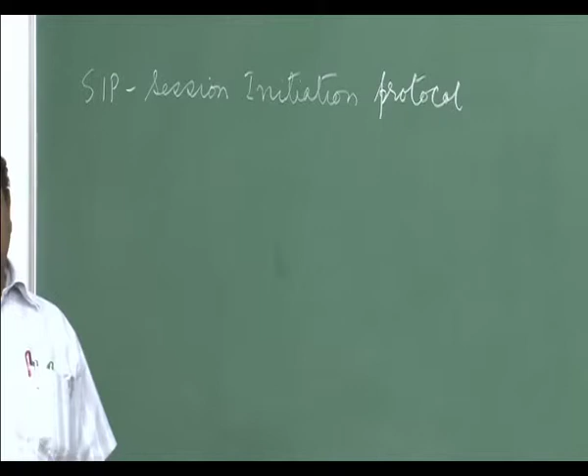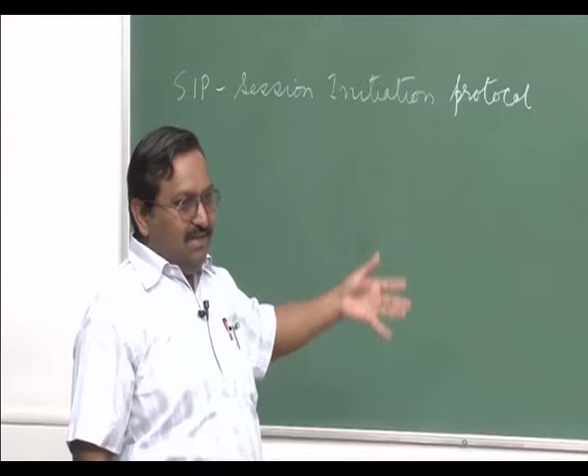Some of the small stuff I had already been telling about this protocol. As peer-to-peer computing evolved over time, it became the basis for voice over IP telephony, so people thought of building up a protocol stack. This was one of them. Then there was another one; the remaining four I have told in my earlier lectures. If they are paired together, they form a complete multimedia architecture functionality.

In a very limited sense you can build up a simple VoIP telephony system. In fact, all existing telephony infrastructure can be implemented with this, and most telecom operators will slowly be moving in this direction. One of the first was British Telecom, which made a complete change to voice IP based telephony. They no longer use circuit switching in their network; they use completely VoIP systems. Even for a telecom operator, it does make sense to build this kind of thing.

But as of now in India, I think it is not legally permitted to use IP based telephony unless it is PC to PC; PC to PSTN is not permitted here. The only exception is call centers, where over an IP network all the calls come in, and they are received over an ordinary telephone line. That is the only exception.

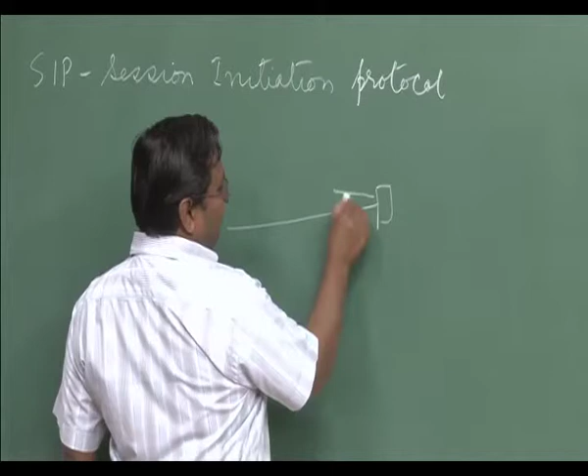As of now, operators actually do this, I think - that is my feeling, I have not verified this fact - but it is possible that from your home the phone goes all the way over the same copper cable, and at the exchange they just put a media gateway, and then within their network they can route this as a voice over IP call to the other endpoint, and again go out as an ordinary copper cable. So this is technically possible.

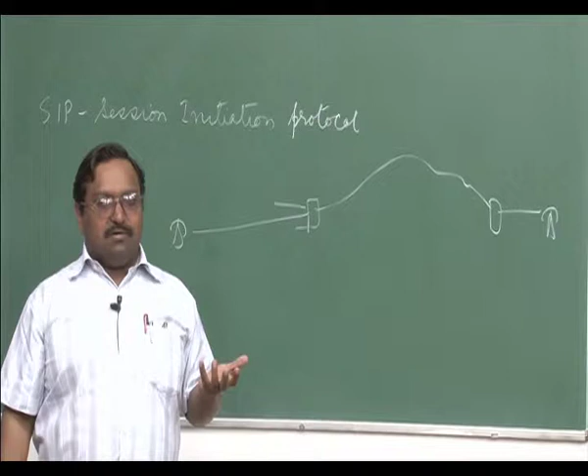So you don't get a feel for it - you still do all the dial-up and signaling that happens in the conventional structure, but in the core it makes sense to convert it to voice over IP, because your cost will be very low. You are only going to use bandwidth when the person is actually talking. Otherwise there is no packet being generated - if silence is detected, nobody is talking, so do not generate any packet.

That is a very specific feature in any digital recording system - this actually happens. For example, when I am not speaking here, the system will figure out that I am not speaking, there is a gap. Even if there is some noise or perturbation, the system should identify this through threshold detection, because when I am speaking the signal level is greater than a certain threshold, and noise is below the threshold. So when it is below the threshold, do not digitize - well, you can actually do digitization and get some PCM code for that, but that is immaterial, you simply discard it. This will be done by all the systems.

This means for a telecom operator, even in the core, if they start using this infrastructure it makes sense, because they will be able to push through a large number of calls, and they need not maintain two separate overlay networks over the same infrastructure. Currently they have to maintain an SDH, where voice is transported without any compression, because it is a 64 kbps channel fixed for every voice call. So he consumes 64 kbps per voice channel plus overheads, and then he has to overlay a data network separately, because most of these operators are also providing IP connectivity.

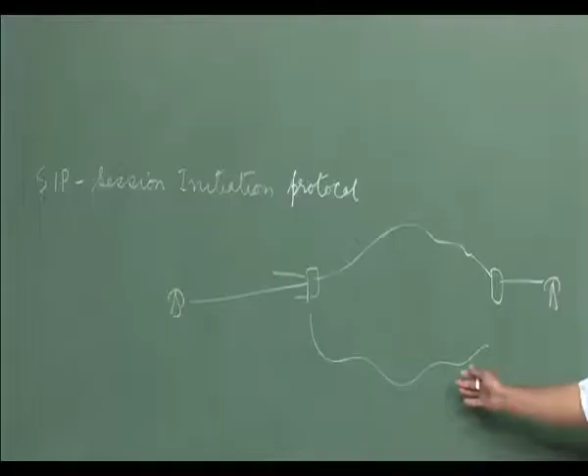If they go for this kind of infrastructure, there is no 64 kbps limit - there is silence detection, hence a tremendous amount of compression can happen, and no separate data and voice network is required. The only thing is that for voice you require quality of service support, and that can be handled using MPLS in this case.

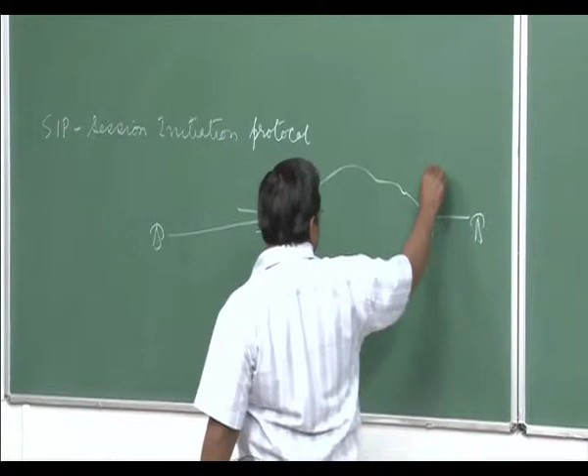So that will be one way, but in fact the user will never figure this out within an operator. And when an operator is going to talk to another operator - for example, if I make this a cloud of an operator - it needs to talk to another operator because the destination phone is there.

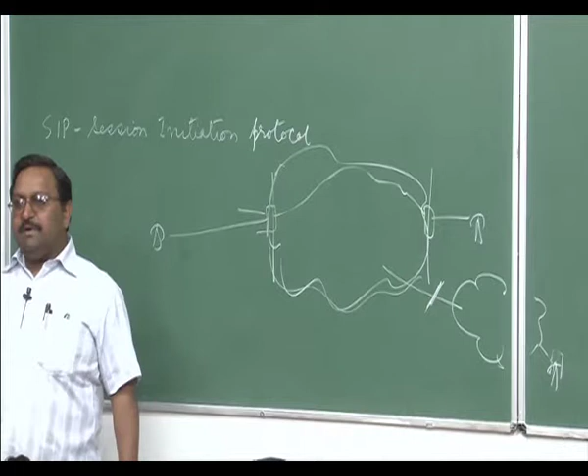This peering is not IP based. This peering is like conventional PRI lines kind of thing, 30 channel circuits. This typically happens in various different cities between the switches. This is an option, but I am not sure if this is being used in India as of now or not.

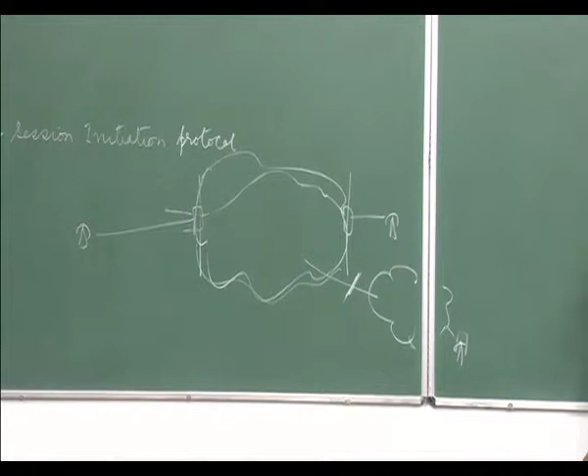This is mostly it will be a circuit switch link, it will be mostly PRI lines, primary rate interface ISDN is a 2 Mbps circuit over which 30 voice circuits can be set up at any point of time.

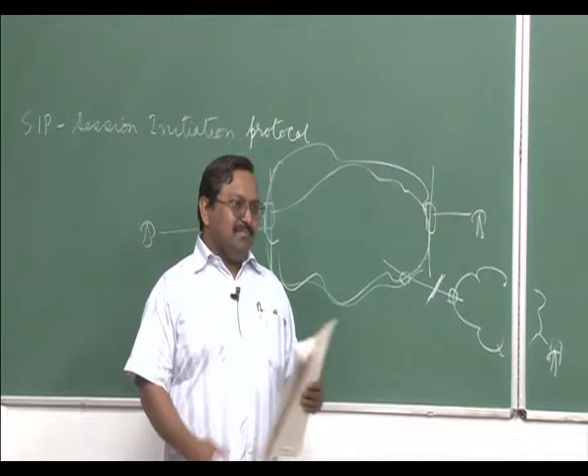It is E1 PRI is ISDN PRI. In fact that E1 is of two kinds, R2 MFC and PRI, but R2 MFC is no more in use, mostly PRI lines are used. The only difference is the signaling channels, how the signaling is actually happening for various voice circuits, that is the only major difference. R2 MFC are no more in use, nobody uses them, because we discarded them almost 7 or 8 years back at IITK.

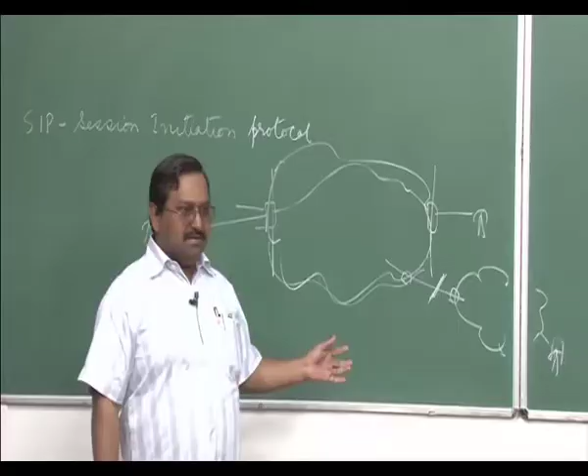Now, coming to SIP. So, how will SIP actually work?

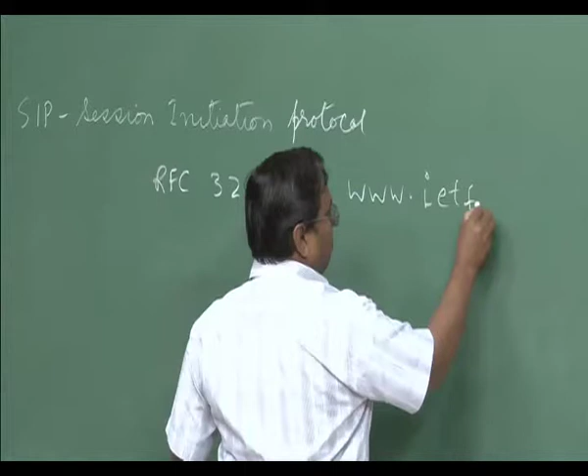So far I have given the name, now let me give the number of the RFC. The RFC number which defines the core of this is RFC 3261. This RFC is available at, and currently it actually obsoletes an earlier RFC which was 2543.

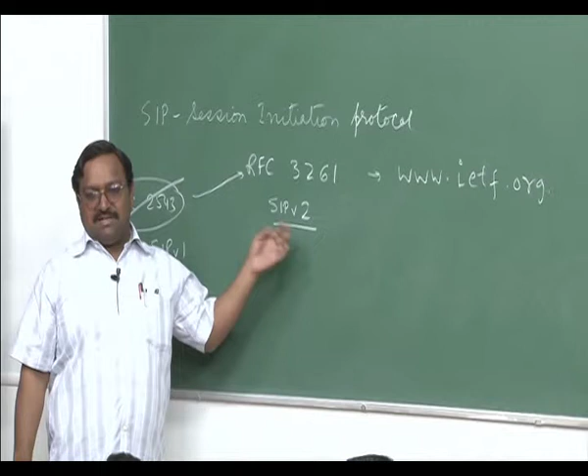This was the older one, this has been scrapped now. All systems actually follow this SIP, and it is not explicitly mentioned, but nowhere in the text in RFC do we call it SIP version 2, except when you look at the header fields which are being transported between two endpoints. That is where SIP/2.0 will actually come.

The way HTTP has HTTP/1.0, HTTP/1.1, same way we will have a specification here, but this standard itself does not tell that it is SIP version 2. This was SIP version 1.

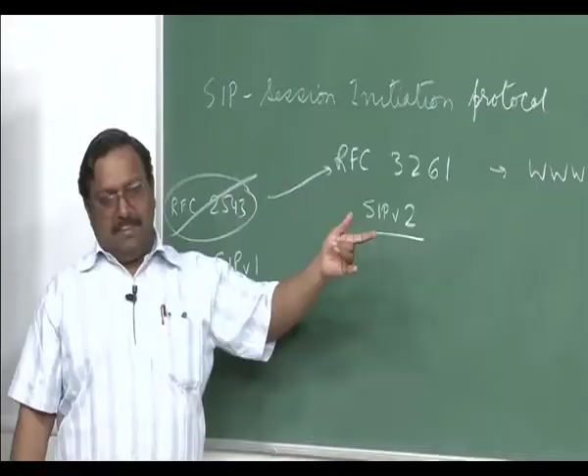So currently we always look for, most of the equipments are built with this. There have been some changes in between, so I am not going to cover this particular part. We will be working only with this one.

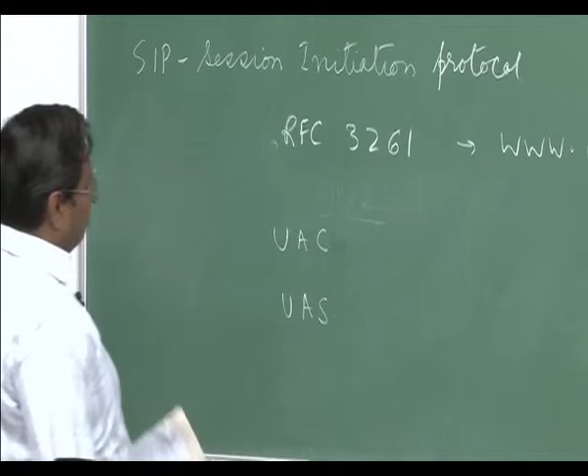Now, the entities which are defined, first thing are, there are two basic entities. One is known as UAC, the other UAS. This is typically known as user agent client, and this is known as user agent server. It is important, both of them are actually user agents.

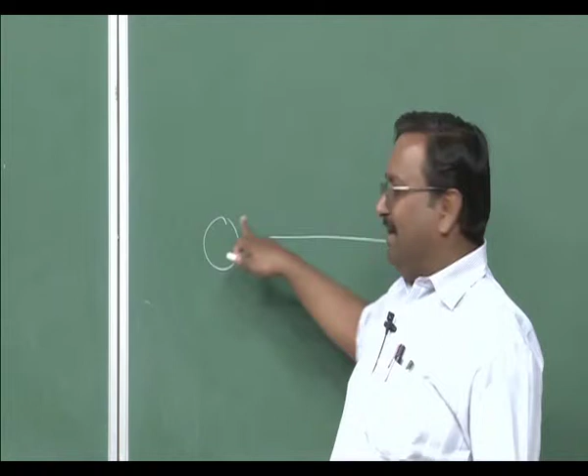The way this definition has come is, there is one peer, there is another peer. If this person sends a request, it is acting as a client, it is a user agent only, it is your soft phone, but it is acting as a client because it is sending the request. And this guy is now going to respond, so this is known as user agent server, but both of them are user agents. So it will respond back to the client.

Who is initiating it depends on that, but both of them are user agents. So one is known as caller, other one is callee. This guy is starting the call, this is receiving the call, this response. It can be other way around, this can work as a user agent client and this can become a user agent server. As far as the software design is concerned, there will be two separate portions.

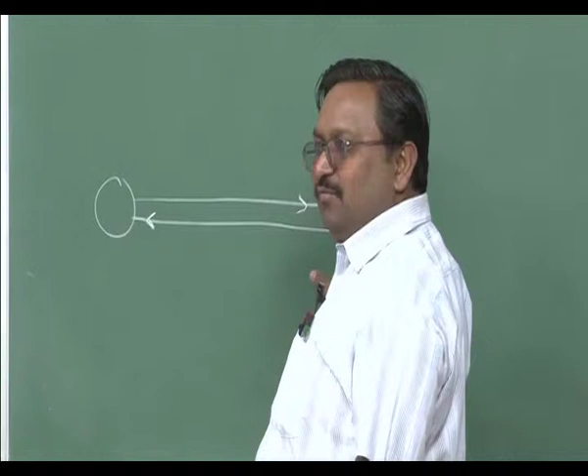One portion depends on which takes care of the requests, and whenever a request comes, what is the corresponding response which has to be generated is handled by user agent server. When this guy is initiating it, there is a separate software component which will be participating, but each client will contain both user agent client as well as user agent server, both will be present.

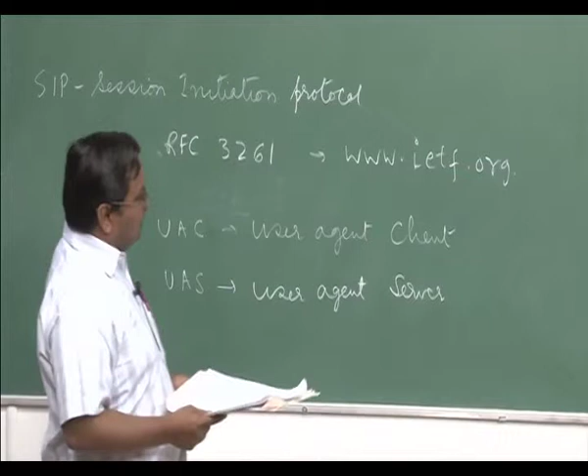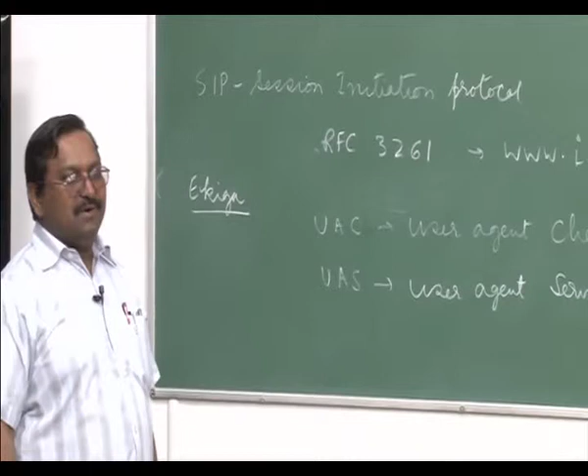Now, there are many other things, these are the two entities. Most of the SIP phones will actually provide this, or if you get a phone on your machine. One of the very popular SIP phone software is Ekiga. This is available for your Windows, so you can download and install it. You even can actually make a phone call through this, this is technically possible, and this is a pure SIP client.

Similarly, this also comes for Linux and Windows both.

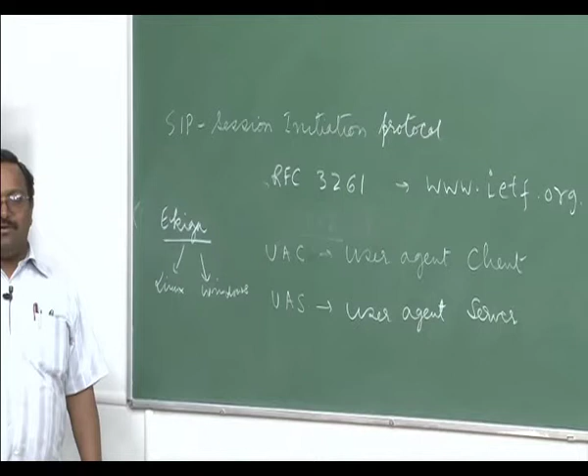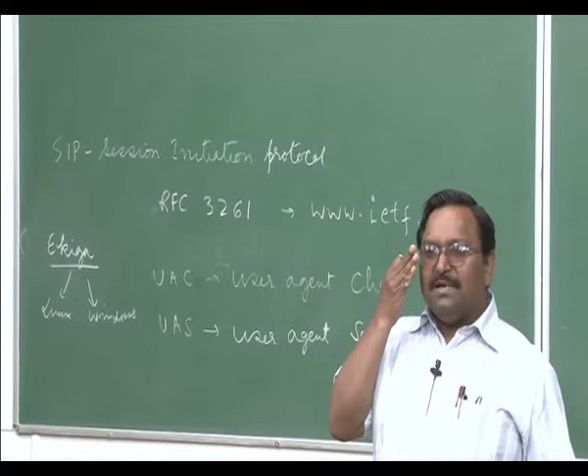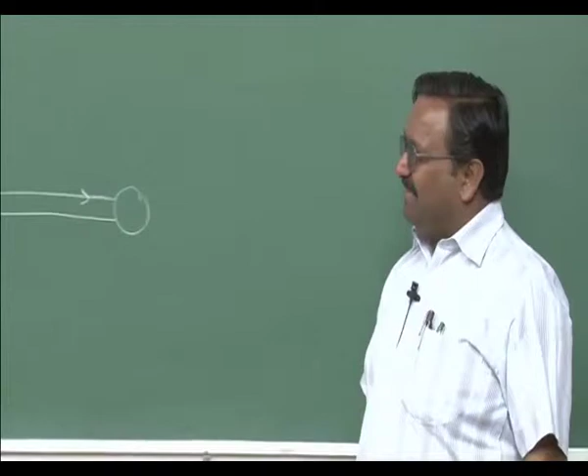I am using a free one and it can connect to multiple proxies, that is the advantage. It can register with multiple of them. So my C-SIP client on Android also connects to my Ekiga account.

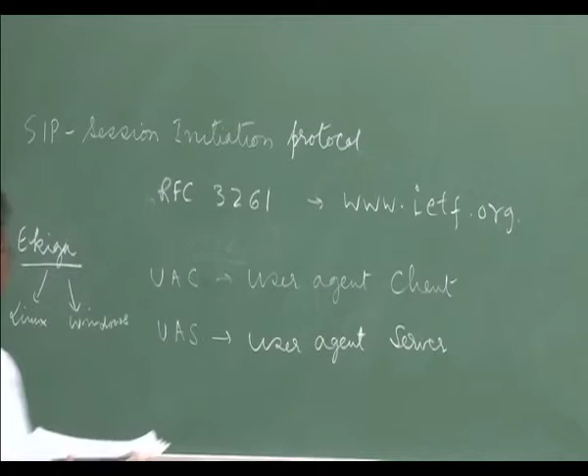I have an account here, so you can give me a call even on that. My phone number there will be YN Singh-9, that is my phone number 9452048451 at ekiga.net. That is my SIP URI, but it was not a phone through Ekiga. The dial tone will be the same of course if you call it. Nobody has so far called me. I have had this account for more than six months and have not received any call on it. I am still waiting for the first one.

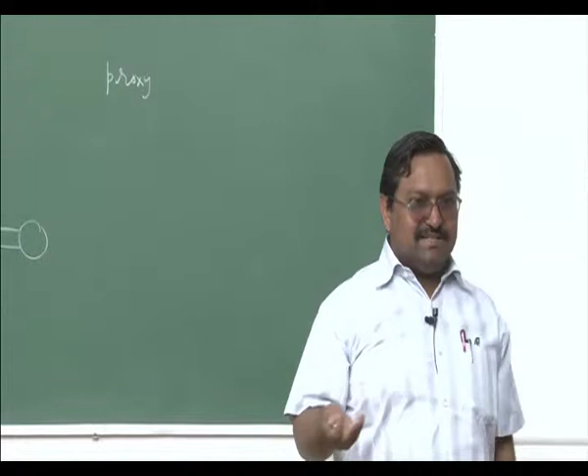So user clients, now you will have more elements. One of them is known as proxy, typically also known as SIP server. This is technically nothing but it is not an indexing server, remember. In the earlier case I have not talked about, proxies were not there, so the equivalent of proxy was a reflector node or a super peer. Super peer in Skype, or in case of Brihaspati Sync it is a reflector, that was equivalent to proxy, but we call them SIP proxies.

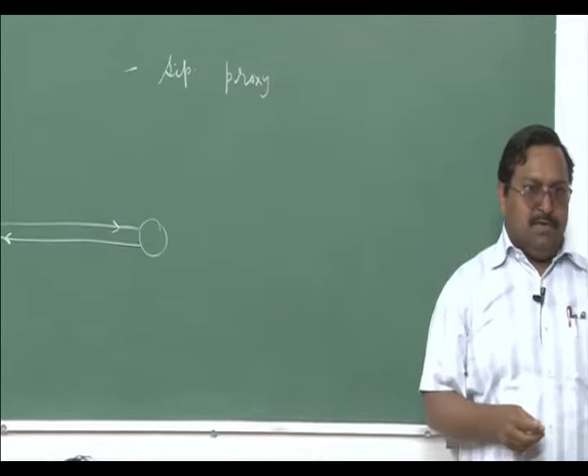That is the third entity. User agent client is one, so one will be server, one will always be a client, then SIP proxy. This usually is an intermediary program. You want to make a call to somebody, you cannot make a direct connection, so you tell somebody who, on your behalf, will try to set up the connection, will find out, will register, will find somebody, will set up a connection on your behalf, and will inform you back to whom you have to connect, on which port, and what parameters are accepted, and based on that you will make the call. So he does everything on your behalf.

This will typically be a requirement because of multiple domains, because I might actually get my own SIP proxy. My own SIP proxy will only permit the phones, will only know the numbers which exist within IIT Kanpur. So whenever you are trying to talk, you always request that proxy to set up the connection. The proxy will also be having an indexing server, we call them registrar in this case, equivalent of that. So whenever my device is active, connected to the Ethernet port, powered on, it will register with the registrar.

And of course, MAC address binding will usually be done. So it knows that this IP address corresponds to this particular phone number, but this MAC address also corresponds to this phone number. Usually what happens is somebody else can spoof your IP, but cannot spoof your MAC address. So in between, somebody cannot take it unless you log in even from that MAC address. So that thing is also additionally done as a security measure. This has evolved over time.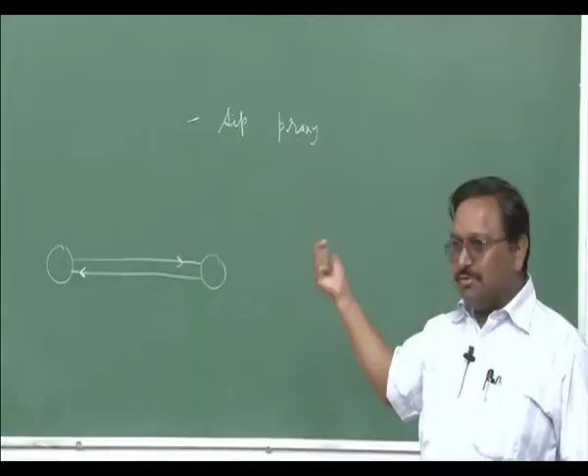From IIT Kanpur, if you want to make a call to somebody outside, there are two ways. One is there is a media gateway, and I even have a PRI line connecting to the PSTN network, so I can route the call through that, through the PRI. Or one way is, suppose BSNL is going to run its own SIP proxy, then we will have an agreement, we will know each other and authenticate each other. That is a way, because even now when I connect my PRI, the wire comes from BSNL and we technically authenticate using that physical port. If somebody takes that physical port out and connects to his own machine in between, he can start making calls as if it's IIT Kanpur, it does not matter. So there is technically no security in PRI except it is a physical port connectivity.

Here there is no physical port, I am connecting over an internet line, so two SIP servers will be talking to each other. Whenever you want to talk to somebody on a BSNL line, and I have only done a tie-up with BSNL, now you want to make an international call, how will this be done?

Most likely I will tell my SIP server that I want to make a call, my SIP server should talk to BSNL's SIP server, like an exchange, and it will talk to somebody else, and ultimately the other guy will inform his SIP phone at the destination. Once he accepts, the message comes all the way back to me, and once we both know who is the destination and what is the IP address, he will know my IP address and port number, and then we make a peer to peer connection.

The call is set up and we keep working with that. But there are complications in this. For example, I cannot do a midway negotiation not through the SIP proxy. It can be done directly also, but sometimes it is not required, it should not be done, because there can be a problem.

For example, you are making a call to your friend, and in between a third call actually comes in and you want to add him to the call. Adding a third party to a call is a complicated process, known as a mid-call feature. This cannot be implemented if a peer to peer relationship is done.

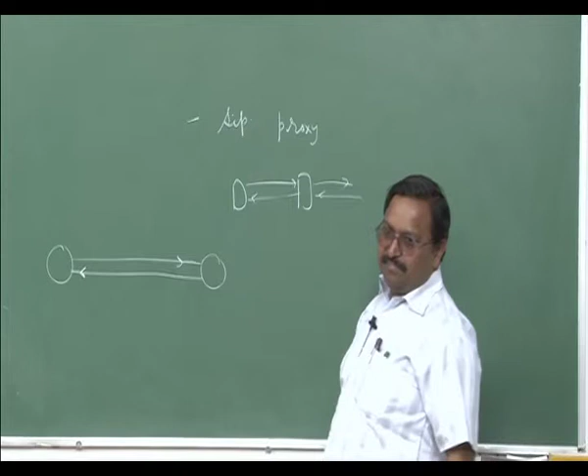The SIP proxy does that, it is an intermediate - a client will connect to the SIP proxy for signaling purposes, not for transport. It will make a request, response comes, it tells the response. So this will be the proxy.

The way we have an HTTP proxy, similarly we will have a SIP proxy, and our HTTP proxy also checks the login and password, otherwise it does not permit. Same way it will also check the validity of all users here.

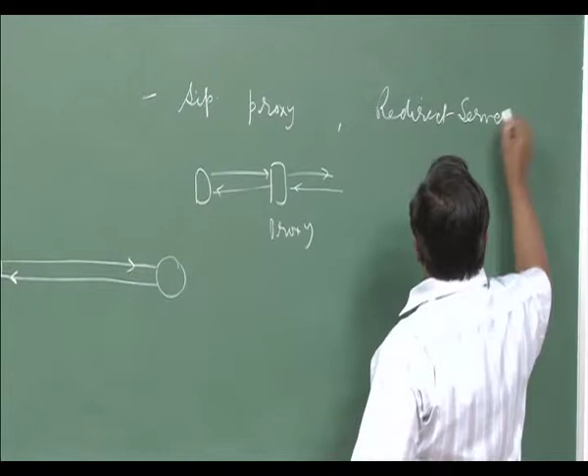And we will have something called redirect servers, another entity - forwarding agents technically. So you can register yourself onto the redirect server, and based on that, all calls actually terminating for you will come to the redirect server, most likely it will be your proxy. So within a domain I can have a SIP proxy for that domain, and I can have a redirect server.

The SIP proxy can maintain where the person is currently, he can be mobile, moving somewhere else, so I can give a redirection URL. Say you have changed organization, gone from IIT Kanpur to IIT Bombay, but you still want to maintain this number, so every time the call comes at your address at-rate iitk.ac.in...

...once the phone call comes here, the redirect server will find out where the call has to be forwarded, where the signaling has to be forwarded. Remember, the voice call is still not going to come to Kanpur, it is only peer to peer directly between end users. This request can now be sent to multiple places simultaneously through the redirect server, that is the beauty of it.

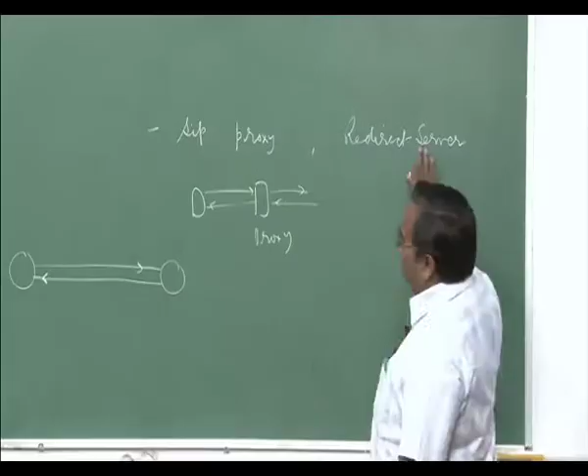And whichever place actually gives a reply, it will come back. This is done through mapping - remember, it is not the same address, one address is being mapped to another address through a mapping table, that is all that has been done. The way mail is forwarded, for example, you can forward your mail coming to iitk.ac.in to gmail.com - it is technically doing that same work, only for signaling. It is a special kind of proxy, technically.

These are all logical entities which I am telling as of now. You can put them in the same box running as a separate process, it is fine. Physical is only a box executing a program. Operating system can run multiple instances, separate instances of separate programs, but physically it is the same box.

Roaming is slightly different implementation. In roaming, your name, your destination address does not change, your phone number remains the same. Redirect is where you have got some number, you go to some other place, you got another number, and I am redirecting the call to that. It can be even conditional redirection. So you are trying to dial your number, you are not picking up, after some time the call will be forwarded to another number, which is call forwarding actually, equivalent to that thing in signaling, but they call it redirect server in SIP terminology.

No, registrar is a separate logical entity. And this is not an indexing server. SIP proxy is not a SIP indexing server, proxy is not the indexing server.

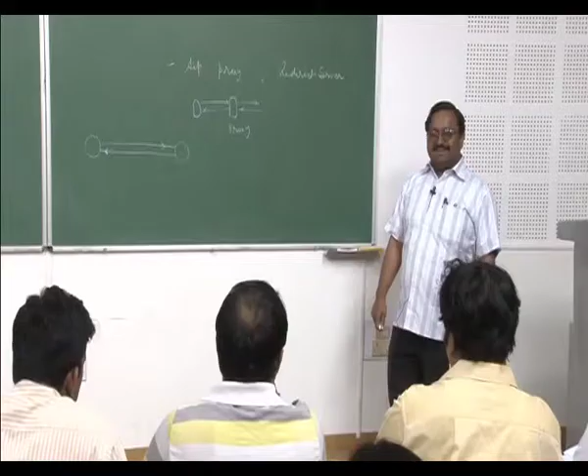But who will maintain the directory? Who will tell the user that this user is connected over there? There is no directory. Somebody has to tell me, I have to tell you what is my phone number, then only you can call me. Directory you have to buy from BSNL, if BSNL is maintaining a mobile directory, or I have to give you a number, or you have to have my email or my website from where you will get the number. Unless I give you my number, you cannot call me. And there is no directory server in PSTN. You cannot say give me the phone number of YN Singh, it is maintained over a separate website, a separate booklet.

So for example, I dial that SIP number, otherwise what will happen, anybody can start calling you who you do not want to receive calls from. But if I dial a SIP number, where does this request go to? I will come to that particular sequence of events, the trapezoid of communication. The next one is your registrar, the final entity.

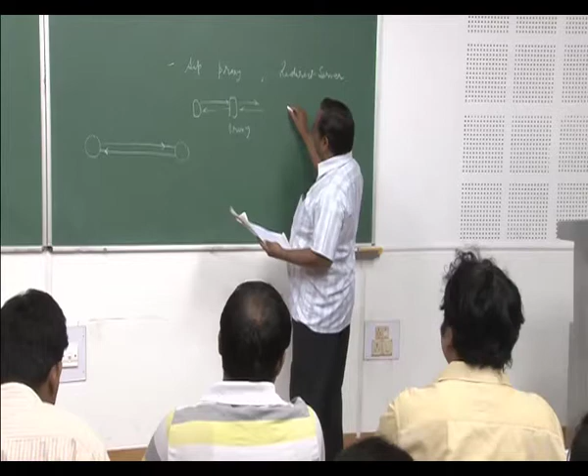So here, the moment you will have an ID, this is known as your SIP URI, that's what it's actually known as, which will identify you uniquely. So for me it is YNS-9452048451@giga.net, that's my phone number. So there is no numeric thing, that's the important thing, there is alphanumeric stuff which comes into picture now. But I would have kept 9452048451@giga.net, also would have been fine, but putting YNS makes sense.

So mobile phones also, now you dial, you don't dial by putting numbers, you always store them and dial with the name. Androids, of course, become extremely powerful because they are synchronizing directory from a lot of servers available over the internet, LinkedIn, Facebook and everything. So you actually dial names, email IDs technically, and there is a display name correspondingly, you dial that, or you search with an organization, so my organization name is also there. Google does provide that service. So in the phone itself I can push the number, it will know all the numbers from Facebook, LinkedIn, all other stuff. So far as there is a common email ID across all the accounts, all of them are joined together, that is the functionality of Android. In fact I think almost now BlackBerry Z10 as well as Apple, they are also providing very similar services.

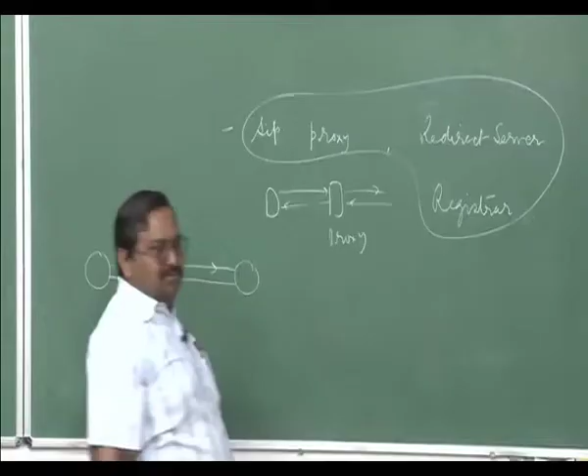So mostly all these will be nothing but separate software processes running in the same machine. When you will buy a server, you will just run them. What this registrar will contain is only the access to a database, where when you attach your phone or whenever you change your IP address, you will re-register with them. It maintains your SIP URI and what is the corresponding attachment point as of now. The attachment point is technically IP address, MAC address, port number. And there will be a signaling thing, a signaling port, and then a data transfer port, for voice or media, for example, which can be dynamically changed for security purposes.

This is not a new technique, this has been used in the FTP protocol. In FTP, it's not that you just tell your machine on the other side and the machine sends you the file on the same port. This does not happen this way.

You make an FTP request over signaling ports which are identified. FTP actually happens on, I think, port 21, or 22, one of them is SSH, 23 is Telnet I think. So the FTP port, when you connect, that's signaling. You tell it that you want this file to be transferred to you, you put or whatever it is. So the other machine actually tells on which port you should transmit, on which port I am going to set up a connection.

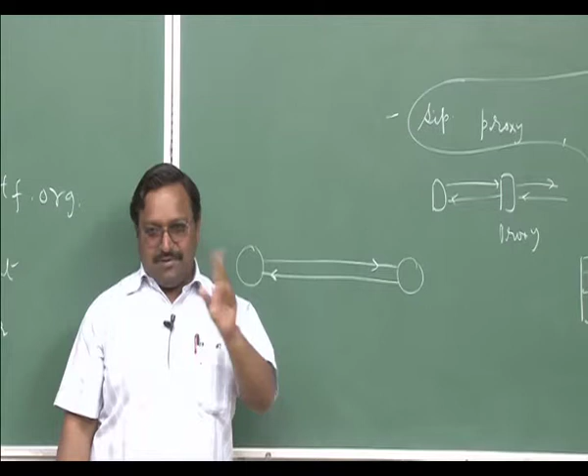So that side, the server actually sets up a connection in the reverse direction. So the TCP connection for data transfer is not set up by the client, it is done by the server. The server sends the connection back on that port where you are supposed to receive it, and then the transaction of the actual data file happens. So again, this was all done for security reasons. This was a kind of hack which was figured out and implemented in FTP protocol, and this was the earliest design of this kind.

So the registrar will maintain this, and the redirect server will also get most of the information from here. Technically it will be nothing but a proxy, but it will have access to all this data, alternate paths. So this registrar keeps track of where you are currently connected, or what all active machines are there. Here it will tell where the call has to be forwarded, in what case, in what scenarios. So this will be a separate database attached to this. This will only maintain what we call the current active signaling paths, only information about those.

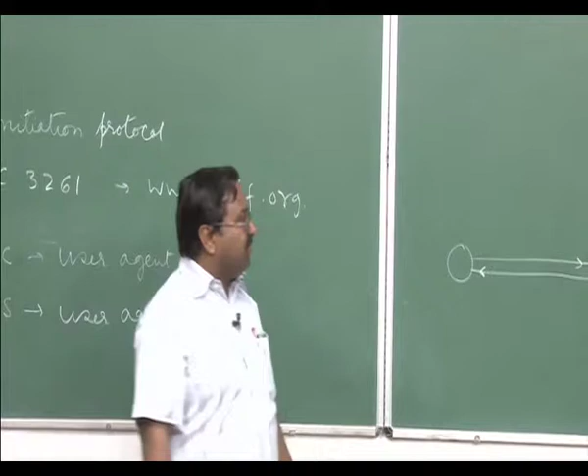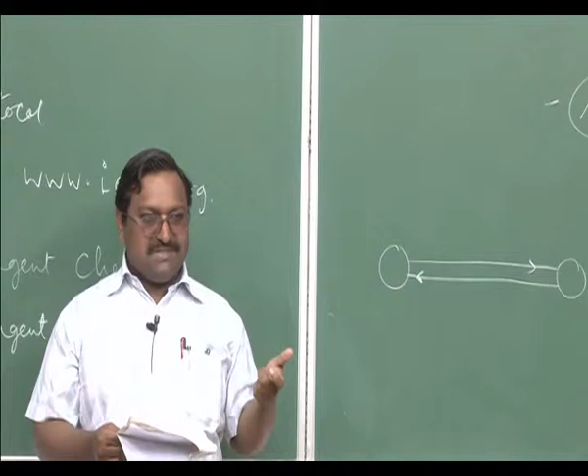So typically, the whole structure is very similar to HTTP, Hypertext Transfer Protocol. Whatever response you send, the first line will contain the message you are sending in this signaling mechanism. For example, in HTTP you always do GET, POST. So usually you will always say GET, and then the URI, and then you will have HTTP 1.0 or 1.1, whatever it is you want. So that's a kind of thing.

So the same thing will be used here. In the response you will always say 200, which means OK, or something like this. Numeric coding is actually used for giving the responses. Whatever other fields come, this actually tells the machine what's the next state of the FSM which is used for implementing the protocol. FSM is finite state machine, so going from one state to another and so on.

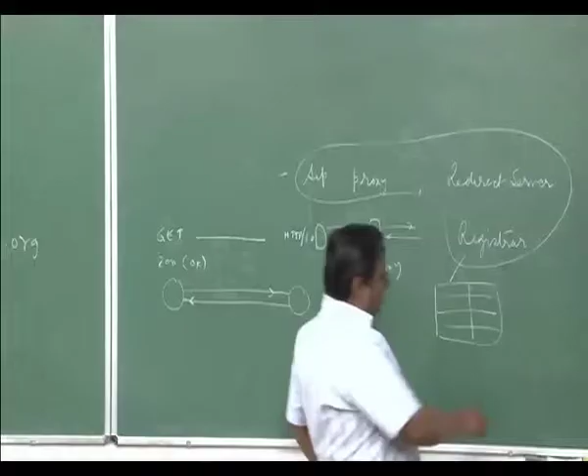So there is a list again which is being provided for various capabilities of these logical entities, so whether I can actually put them as four stuff here. You will have a redirect server as one entity, you will have a proxy, you will have a user agent server, and you will have a registrar.

So the question is whether each of these can act as a SIP client. What about the redirect server? It cannot act as a SIP client, it is only passing the signaling information. It is actually sending back the reply, not forwarding the request like a SIP client would. Your request goes to it, and it sends you back that you should now send the information here. It cannot send the information itself, it cannot forward on your behalf, but it gives you an alternate address. So this cannot act as a SIP client. The proxy server, yes, it can.

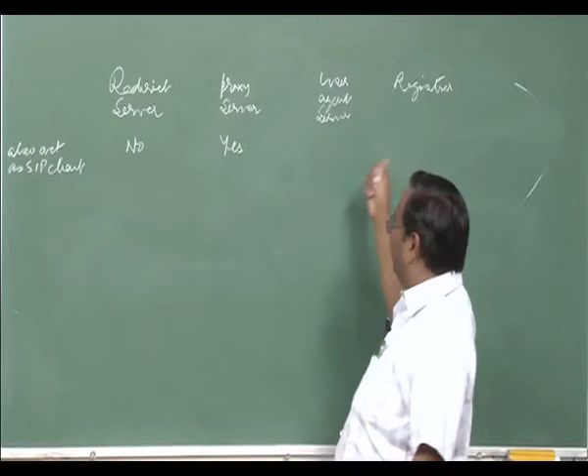The user agent server is the last endpoint, it's a user agent, and this is the server part where the call signaling path terminates. So this cannot act as a SIP client either, it only acts as the final SIP server. So this is also no. The registrar is also no. Only the SIP proxy can do this job, because it does signaling on behalf of a client. Okay, so that's the first capability.

Then there's the 1XX status code. So 100, 110, whatever number, but the number will start with 1. This status code is returned.

This status code redirect server can return usually means: kindly wait, I am still trying. It's not a final response, it's an intermediary response. The transaction is still not complete, it's basically for that purpose.

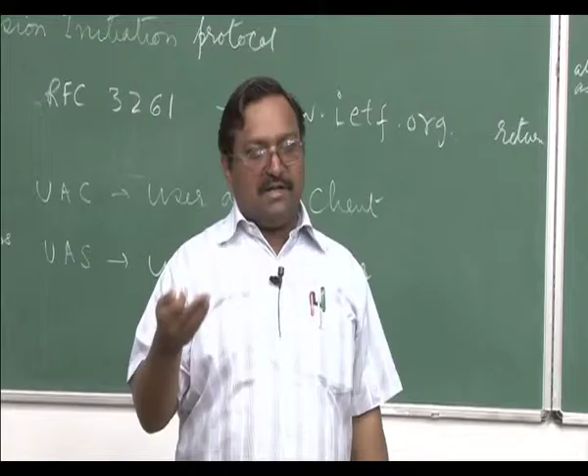Redirect server may say kindly wait, I am still trying to search my database and will give you a redirection URL. Proxy server, yes, each one of them can do this thing. Status codes, we will come to these numbers, what they're used for, as we go along.

These codes are used exactly for what HTTP responses are used for. The same codes are used in many other protocols. The 200 series is for successful completion, 200 is okay for example. 100 is for trying, I am still trying for making the connection. This is how these things get differentiated.

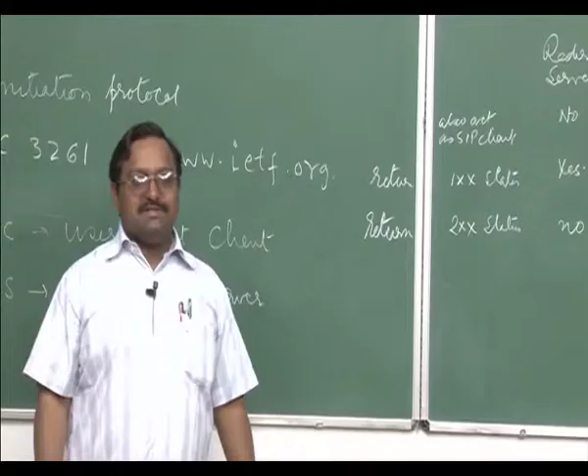So this will not send. 2XX cannot be sent by redirect server because signaling will not be terminating. Other servers can send it because they can terminate the connection. When you register with the registrar, it sends okay, I have registered, everything clear, transaction is over, so it can send 200. But not the redirect server, because the transaction will not be complete, it's giving a redirection, and since transaction complete has not come, this guy has to keep on working based on the response.

Similarly, you will have 3XX. All four can do this. 4XX, 5XX and 6XX. They only go up till 6 actually. So what does it stand for?

I will explain all these later on, not now, as we keep on using them. For example, 100 is for trying, that will come when I start explaining how the call is set up. 200 is when the call, the transaction, gets completed, it is okay usually. So whenever I will write 100, in bracket I will write trying. The protocol machine does not understand this string, it only understands the number, but the meaning will be this. That's the way it will be written in the description. 200 similarly will be written for OK.

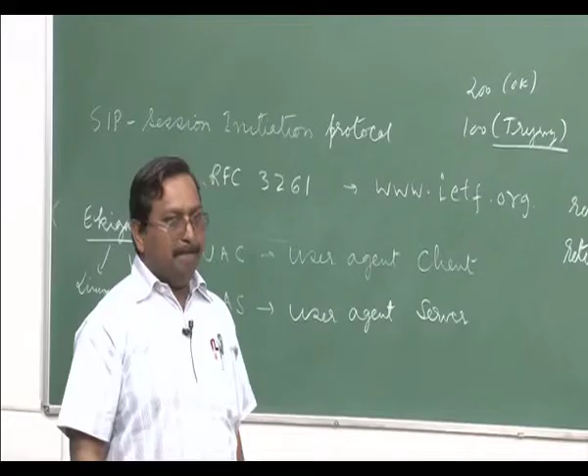Now there is something called the via header field. In the header which is sent, there is something called via. Via always tells that when the response is going to be sent back, don't send it directly, it has to be sent via me. For example, he is asking me, you sent a call for me. I sent the signaling message to you, but I set the via field that via is me.

So you know who is the guy for whom the call is being set up. You will not send the response back to him, you will send it to me. You can send to another person, but you don't add a via field. So that person, when he actually responds back, he will see the first via which is for me, he will send the signaling to me, and I will send it back. So anybody who remains in the signaling path, once everything has been set up, has to keep on adding this via header field.

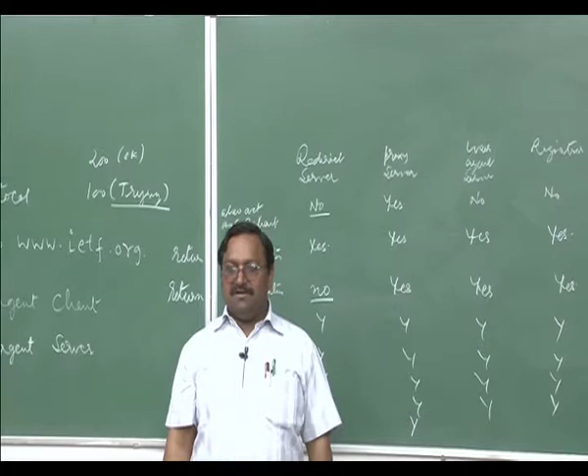Now which all servers can do this? So the next one is whether via header field can be added or not. Obviously redirect server cannot add the via header field because it's not supposed to be the intermediary for signaling. Proxy server, yes. This is not an intermediary, that is also not an intermediary, so they cannot add via header field. So this is no for everybody except the proxy.

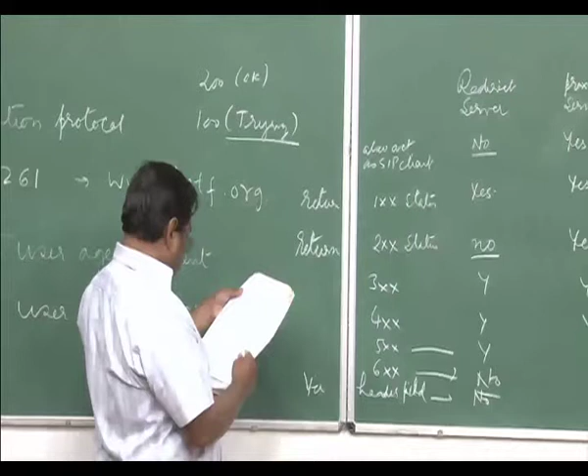Acknowledgement, who will actually send the acknowledgement? Acceptance actually, this says accepts acknowledgement. Who will accept the acknowledgement? So it is yes for everybody except the last one.

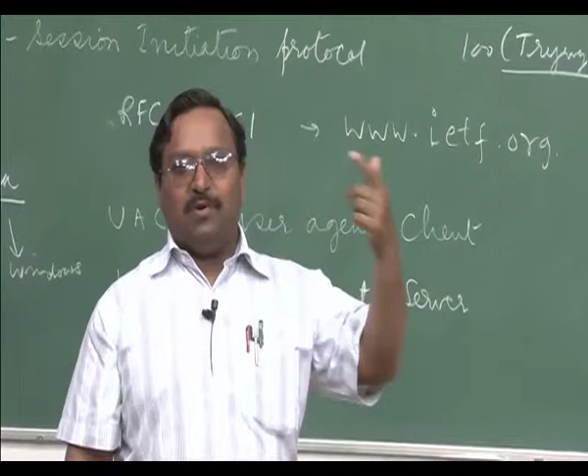And registrar typically uses a soft state based system, so you have to periodically keep on updating. If it times out, the entry will be removed, your registration entry. Because sometimes you have registered your number with a certain IP address binding to the registrar, and suddenly your power goes off, you never had a chance to remove the entry from the registrar. So it's a soft state, not a hard state. It will time out and expire. You have to periodically keep on refreshing that entry. The same thing is done with GSM, for example, every 6 hours, usually a registration has to be sent back to tell that you are in a particular area.

And suddenly you take the battery out, he will still keep on trying in that area. Your registration will not be off, and then he will figure out that you are off. But if you properly shut down your mobile phone, it will be deregistered from there, and then it will not be sending any information back. It will be telling from there itself the phone is switched off.

So now let's go to the procedure. So you will have now these things which will be done by SIP: user location, this I have also already mentioned verbally, but I have not written it actually. User availability, you have user capabilities actually. I am just making them more explicit, but most of it is already understood.

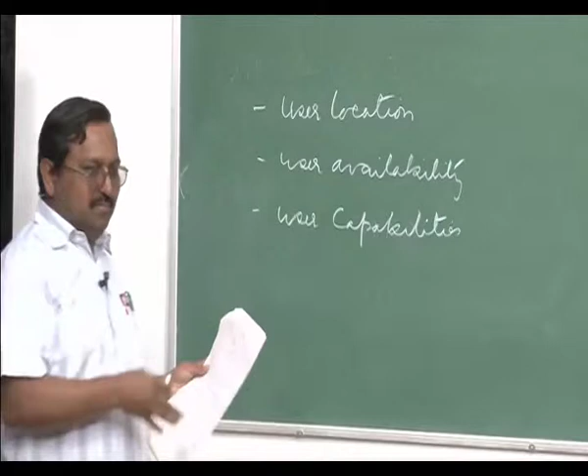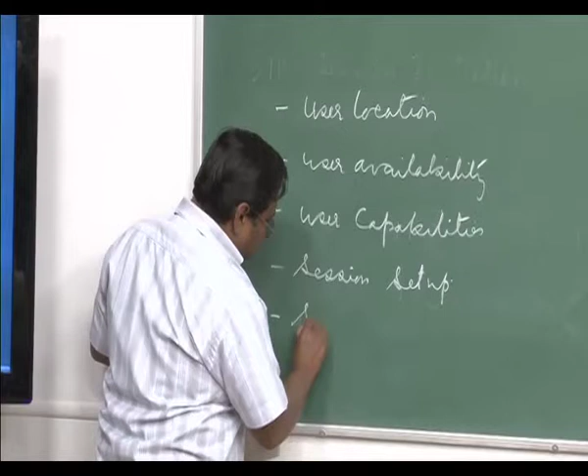Session setup, this basically means ringing and setting up of session parameters. That's what session setup actually means. And then there is session management. Here you include transfer and termination of the session, modifying the session parameters, and invoking services. There are 3 things which will come here. So that's what SIP will do.

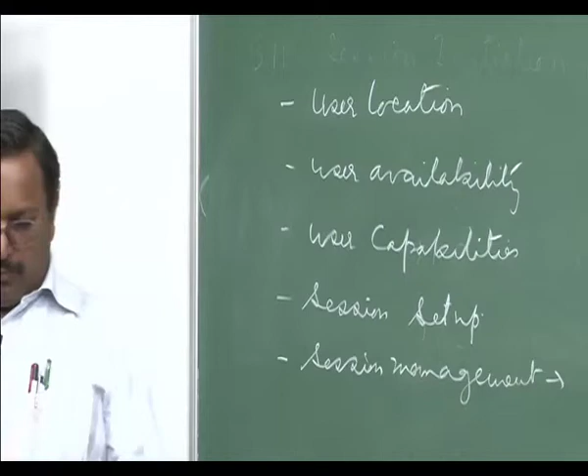So usually you will actually have a trapezoid, we call it a trapezoid actually. I am just taking the same example given in the RFC. So like in most of the examples, Alice and Bob are again present here. Going to use the same name, it's there in the RFC as it is. So does it come from Alice in Wonderland? I think most likely.

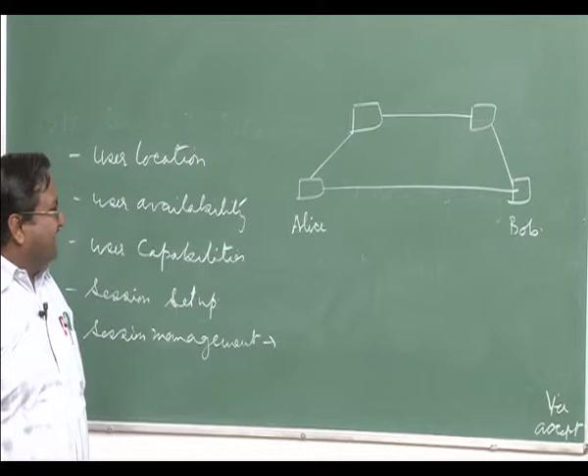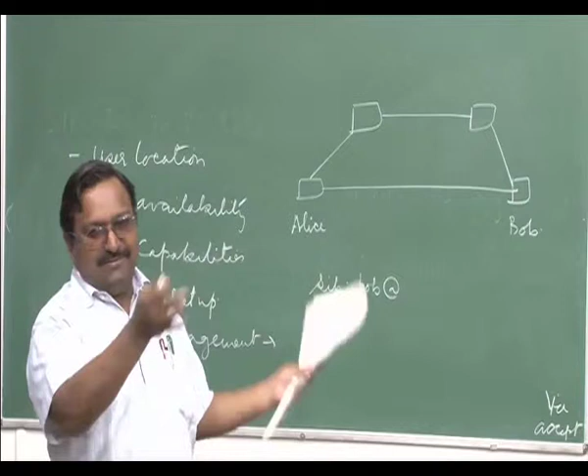So Alice would like to call Bob, that's the problem here, and this has to be solved. So Bob will be identified by a URI, which will be something like this. So since it's being done in the US, they have chosen those names. I am sticking to them. I hope these are all fictitious names, they don't exist. Actual operators are not there with this name. So the RFC is very particular about it, no branding. So this will be the URI, and this is for the gentleman named Bob.

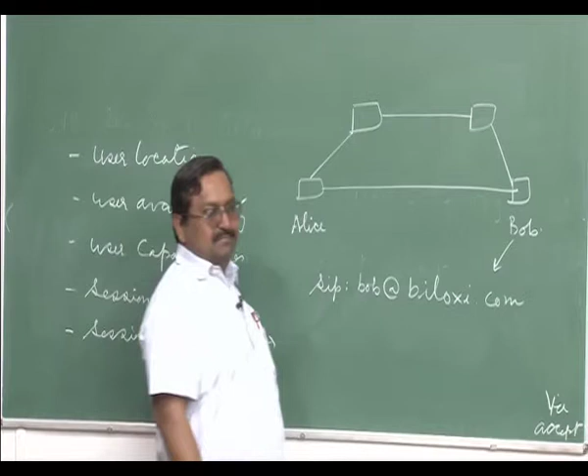So Alice somehow will get to know of this thing. The way I have told you that my URI for making a phone call is SIP:YNS-myphonenumber@akiga.net. So she might have also figured it out from somewhere. Once this is there, she has to make a call. Okay, the URI for this Alice is...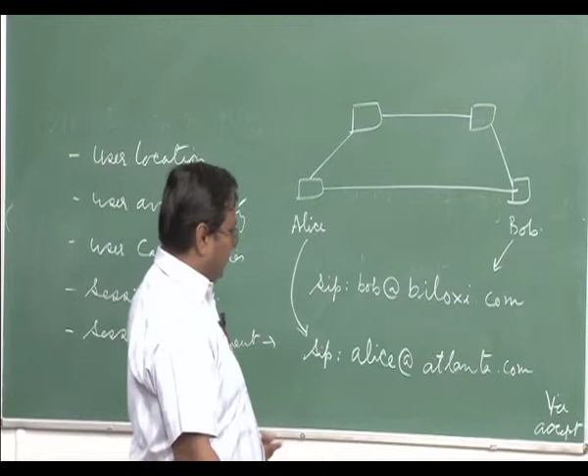So that's a URI, that's a domain, and that's a name. Within a domain, the same name cannot be given to two different people. Naming has to be unique within a domain, but the same name can be used across two different domains, but those will be counted as two separate persons.

Okay, so this is like, you have names, a lot of students with the same name. So usually in your register, like in a DOAS register, it is always son of or daughter of, father's name is also attached, that's counted as a domain name. Unfortunately, father's name can also get duplicated. So we don't have a concept of domain name, but here this has been taken care of.

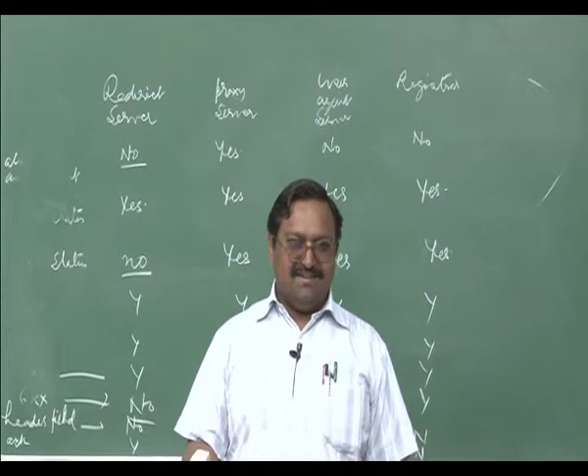Two domains cannot have the same names. So when a new domain name is being requested, it's always searched. If it is already existing, it is never given. So for example, you cannot have iitk.ac.in being given as a domain to somebody else. It's only for IITK. You can change something else, or you can become a subdomain within IITK, for example e.iitk.ac.in is fine. Or you have to change IITK, either you change AC, or you change in. So domains are always unique. So that's the way the naming will be there.

Now how the message, what's the fundamental thing which will be done? So the most fundamental thing is the invite.

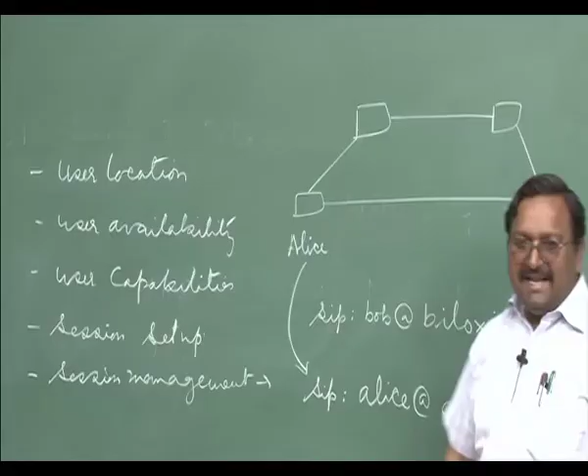That's the most basic thing. When a phone call has to be made, like when you dial a number, a message has to go saying I want to set up a call. So when this is a SIP phone, which we call a soft phone if it's on a PC, or it can be a hardware box containing SIP software, an invite has to be sent to Bob so the call can be made. But she does not know where Bob is, or Bob may not accept it, because there is no way to authenticate.

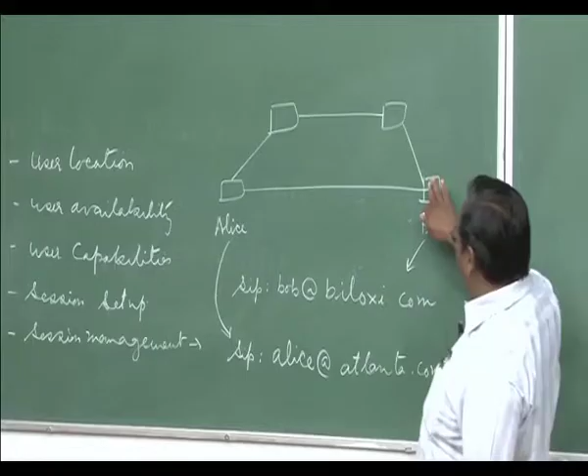That's a problem. She does not know where Bob is, and she does not know where the proxy server for Bob is. A proxy has to be connected, because the IP address of these devices keeps changing dynamically. You switch off your machine, and the next day it takes a new IP address from DHCP, possibly a different one every time, every day, and maybe a different port each time which is available for your server to be activated. So she has to find a way.

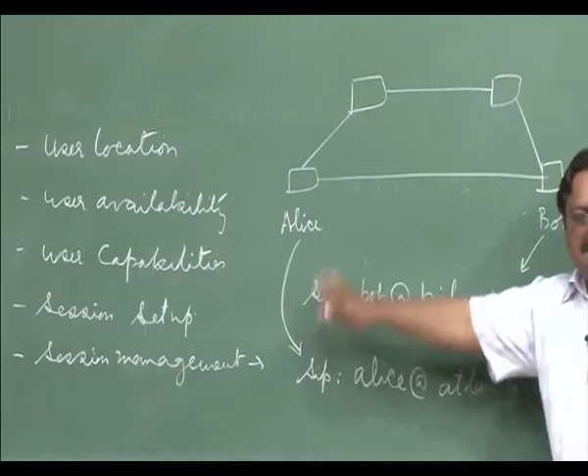So the only way is she has to look at a SIP server within her own domain. The way I told you, within the IIT Kanpur domain, we will have our own SIP server running maybe after 2 months, and then all the phones will have to be configured with that SIP server. So maybe when the phone was provided to Alice, her phone was configured to use the SIP server which corresponds to atlanta.com.

Or when the machine boots up in the morning, there is DHCP, dynamic host configuration protocol. It keeps looking for the DHCP broadcast. Once it finds a DHCP server, it sends a request and gets all the information. So it may get the current time, and the domain name.

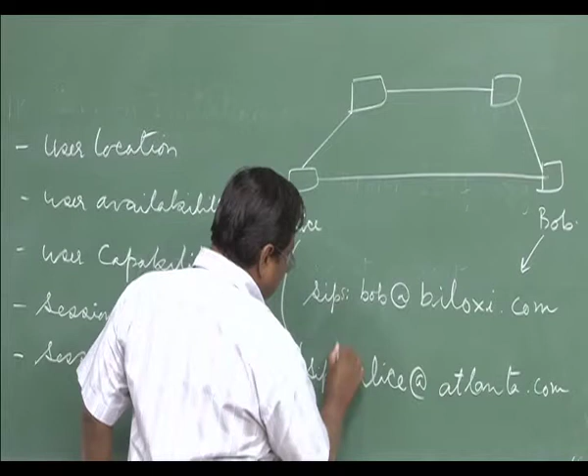So now there is another variant of this which exists. Not only SIP, you can also have SIPS - I can add an S here. This is very similar to how you have HTTP and HTTPS. What's the difference between the two? It's a secure option. Similarly for SIP there is also a secure option. It works exactly the same way HTTPS works. The method is exactly the same.

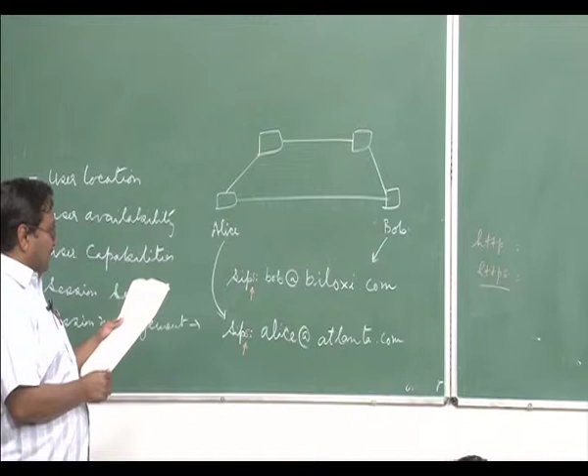So Alice will find out this server, and she will send an invite request - written in capital - to her own proxy which is configured here. This invite message will tell the server what it is supposed to do. When you say GET some URI, you are telling the HTTP server what you are supposed to execute. So you are telling the server what the method is supposed to do, and the response has to come back to me. So invite is the method being told which has to ultimately be executed here.

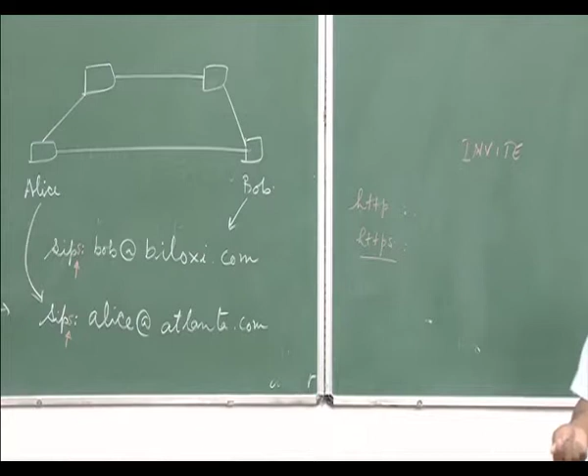So currently this is being sent here, so this will execute and give the response. It's a proxy, it will understand and will again send invite to this - that's a different matter. It can do something else also. For example, if she has not paid her dues, the invite will not be accepted and will be refused, so the call cannot go through. So you might have to pay a monthly rental for taking the service of a proxy server, because there is cost involved - cost has to be borne by the users.

So invite now usually will contain header fields - the invite message. So typically how the invite will look like is this. I am just writing how it will look in text. It's a purely text message - HTTP is also pure text. And remember, all header fields are named attributes. So there will be a name, an attribute name, and the corresponding value of that attribute.

So invite, the first line there is no named attribute, that's the important thing. The first line only tells what method is being invoked, and then after that you will have all the header fields. Then there is one blank line, and header actually ends there.

Then whatever is the payload part of that. So payload, for example, invite might contain SDP. SDP will be in the payload part. Okay, so invite,

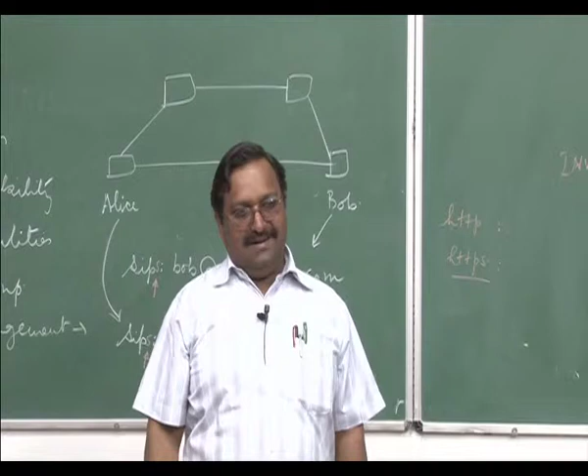If you have been using 1.0, you would write SIP slash 1.0, and depending on whether it's 1.0 or 2.0, the server is supposed to interpret the fields accordingly. The interpretation of fields changes across versions. The version has to be there. Both version 1 and version 2 actually provide for invite.

So the type of header fields here, or type of request, is version 2. And then after that you will have the first field, first letter capital then small, Via. Via is basically through a certain path, or like a street in Italian. Via probably stands for that.

So you will say it is SIP 2.0 compatible over UDP transport. So this actually tells the response is supposed to come back here. So any signaling response to this should be sent here. I can add more via fields also, and they will be in order.

If a new via field is added, it has to be here, so it will keep on pushing down this thing. So PC33, I am again taking the same thing, but that doesn't matter. Now this is the domain name of the machine, the name of the machine on which the soft phone is installed, or this can be the name of the phone itself. Phone is like a computer.

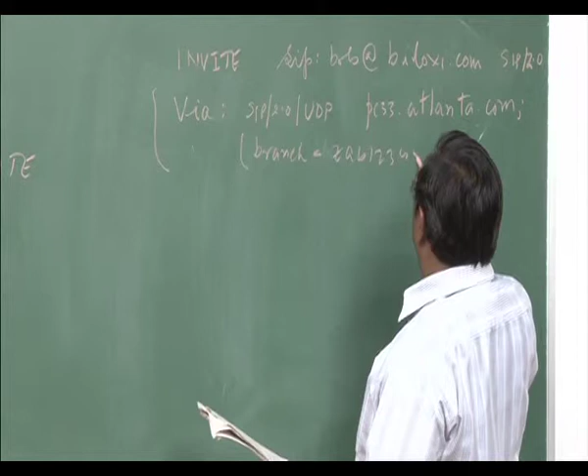The meaning is session dependent. So they have put some value, so you put whatever it is, Z, A, B, C, 1, 2, 3, 4, 5, A, B, C again, F, G, H, whatever you want. So semicolon is the separator within this.

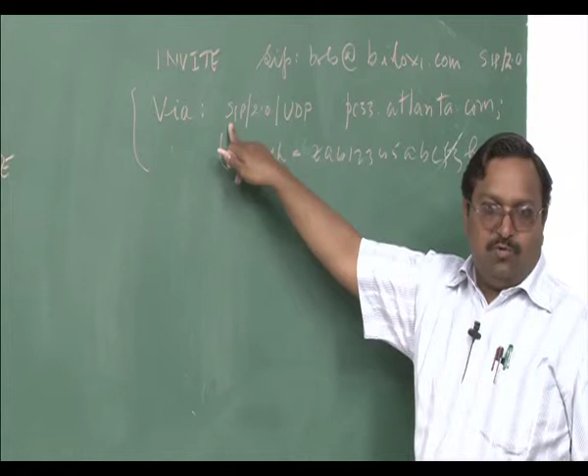So there are two, one is this VIA attribute, which tells the version of the SIP that has to be used, the transport, the machine to whom the response has to be sent, and the response has to come for a SIP 2.0 client. It has to come via UDP. That is what has been explicitly told, and this is a branch parameter.

So branch is going to be unique. What is the branch? Branch is a random parameter which will be used to identify the session, basically uniqueness. There are many random fields, so no two phone calls, even between the same persons, Alice and Bob, can set up another call, and every call can be uniquely identified. This can also be logged.

The PC33, what is PC33? PC33 is some number given to that machine. For example, my machine in my office is actually having a name yamuna.ee.iit.ac.in. That is the name of my daughter, so I kept my machine's name on that.

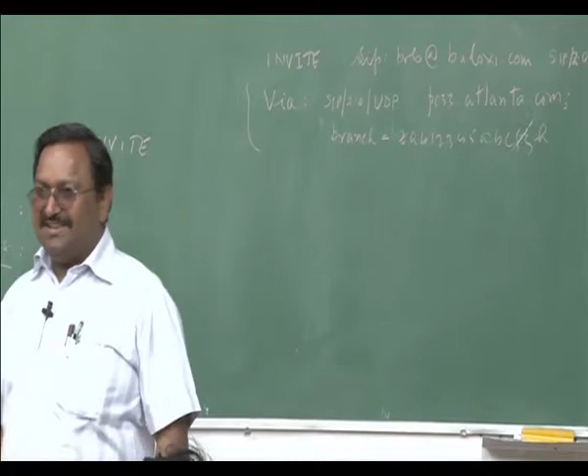So if you have a machine in electrical engineering and want to have a name for it, you have to send a mail to me and I can put that, and then your name .ee.iit.ac.in will resolve to an IP address for that machine. Similarly, a name, if you resolve in the DNS for atlanta.com domain, gives an IP address where the soft phone is installed. That is what it means. Names are easier to remember by human beings, otherwise an IP address could also have been put.